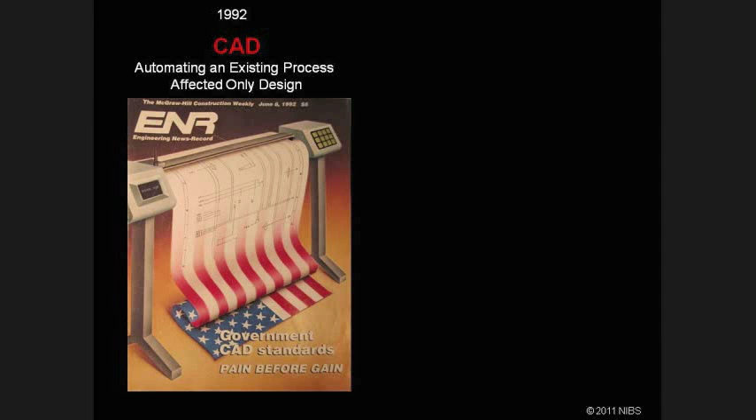Reality. Some view BIM as CAD on steroids, but nothing could be further from the truth. CAD only addressed one phase of the facility lifecycle, design, and only one workflow process, drafting. It didn't really cause us to change our business practices, though.

BIM, on the other hand, can have an impact to all phases of a facility's lifecycle, but that requires us to change our business processes to truly accomplish our primary goal of entering data one time and reusing it. Even more importantly, build an electronic model and then build to the model.

Unlike CAD, BIM is full of embedded information which can be shared with other facilities applications. Think of the possibilities such as combining geospatial data with model data. Then the model, along with its data, could even end up being more valuable than the building itself. There's so much opportunity to share data, but we need open standards to make this a reality.

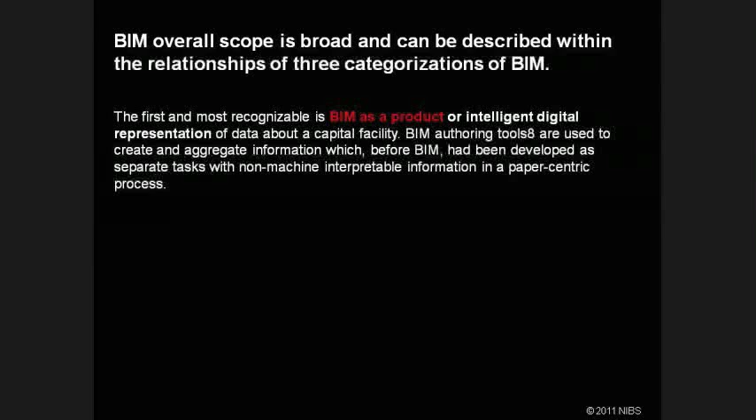People often think of BIM as only a design tool, which produces 3D models with stored building information. Well, BIM is more than just a product. It's also a collaborative process intended to improve business processes with open information standards, which will allow for more automated capabilities, ensuring information fidelity and sustainability.

But BIM is even more important as a tool for effective facility lifecycle management. It can help create seamless information exchanges and workflows which can be repeatable, verifiable, and sustainable. So look at BIM not only as being a product, such as an output of a software application, but also as a new collaborative process to improve workflows in the office as well as in the field. And finally, as a facilities management tool, assisting people who manage and maintain our facilities over their life cycle.

One of the main premises of BIM is to enter data once, then share it. In our traditional way of doing business, we work in vertical silos, and there's a lot of information lost during handoffs from one project phase to the next. We need for information to travel horizontally through the industry.

In order for that to happen, BIM needs to be seen as a common repository for information, essentially the foundation which all activities can draw from, whether it's for life cycle costing, energy conservation, or green building analysis. Although these activities need similar building data to solve issues related to their interests, they are unable to use the same information source simply because they often use different terminology.

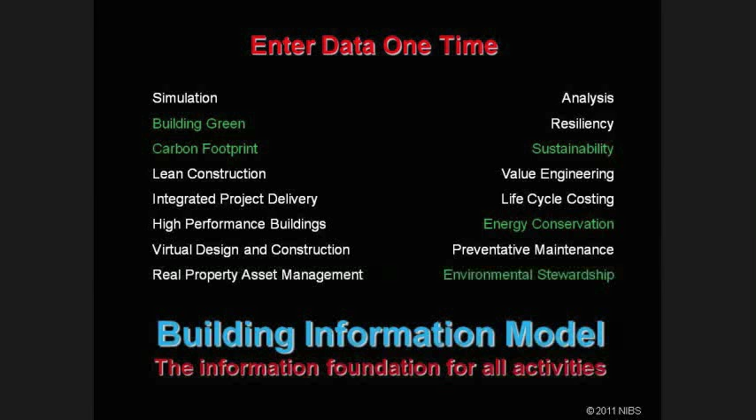Industry needs to recognize that without a standard language for communicating building information, the model data will never be used to its full potential. The Alliance has several projects which are addressing this need for a common dictionary, but we need your support. Help us determine what green data elements could be provided in the model.

BIM could be renamed Built Environment Information Model and probably be more accurate, as it does cover the entire built environment. It also now interfaces with geospatial information systems. Hence, this hierarchy developed by the Open Geospatial Consortium, GSA, General Services Administration, Open Standards Consortium for Real Estate, and ourselves becomes extremely valuable, especially to large portfolio holders.

What it shows is how information can be rolled up from the smallest part on the right-hand side of the drawing to the entire world view on the left-hand side of the drawing. The key point to remember is that you can always summarize detailed information, but the opposite is not true.

If you only collect information at the macro level, then every time someone wants additional information, they need to do a data call. When I worked for the Department of Defense and we had a portfolio of 570,000 facilities, you can only imagine how long that took and how inaccurate the information was, because typically we only had a few hours to respond. So everyone had to estimate, and therefore we could never have truly accurate information.

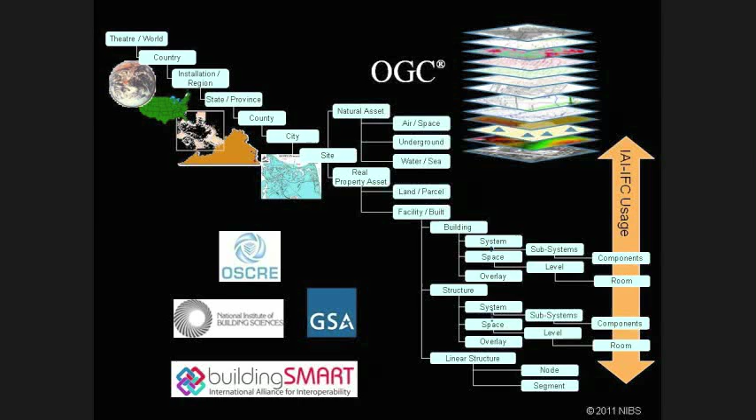This hierarchy allows one to capture both facility and geospatial information and works very similarly to the way Google Earth allows you to zoom into a location. Continuing with our look at the scope of BIM, we see that there are many ways we can use information stored in BIM. In this first view, we see that it's used for structural design.

In this view, we see pictures merged with models to better depict existing conditions in a renovation project. You can build your models from existing facilities as you do work on renovation or additions, and therefore collect it over time.

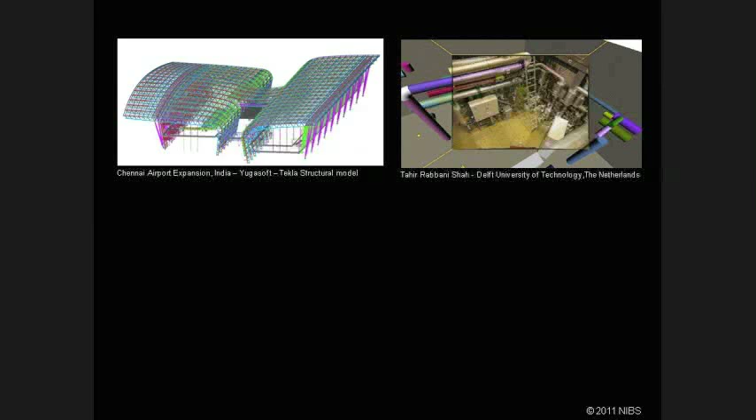If you have existing facilities, you can make the decision today that you're going to use BIM from this day forward. Then start a BIM for each facility in your portfolio. The Coast Guard did this and had what they called BIM blobs, as in their asset database they knew square footage and nothing else. Over time, about 20 years, they now have very accurate BIMs for most of their facilities. They are one of the few I know with that range of vision, however.

In this next example, we scan an existing mechanical room and create a point cloud for that space. From that, we can create a 3D model. Some software tools now can recognize various objects and can suggest some information to begin to build a true BIM.

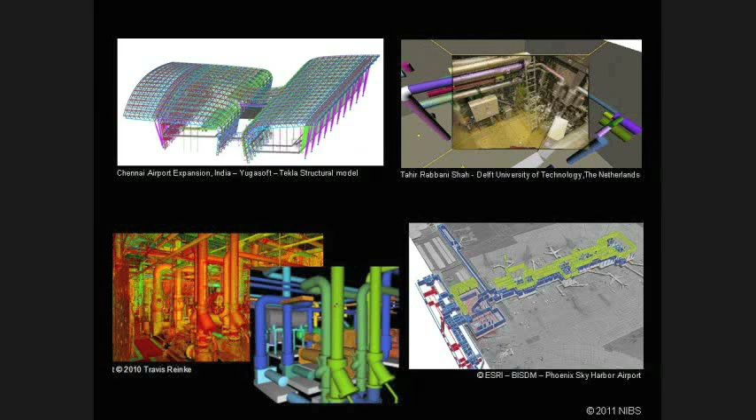This graphic shows an example of integration with BIM and GIS. Our fall edition of JBIM focused on the integration of these two information streams working in the cloud. There's tremendous opportunity in this capability, but also a fresh set of problems. We need to tighten up security and add metadata to our model building.

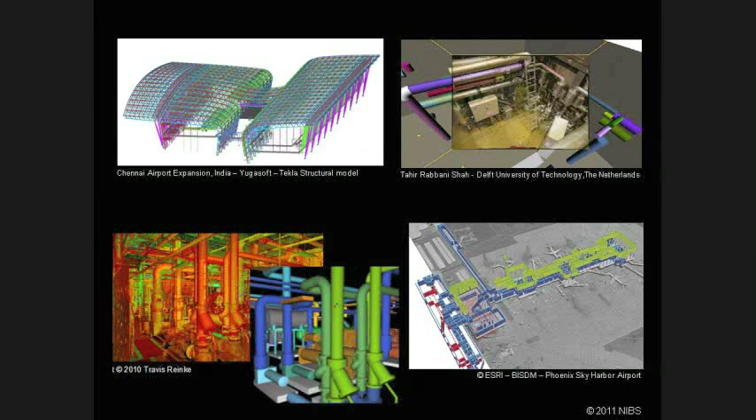This is a task that needs to be done in any scenario if we are going to share and trust information that flows through the model and between stakeholders. Being responsible for one's actions can accurately be tracked in a model. Who did what, when, and for the life of the facility should be of primary interest.

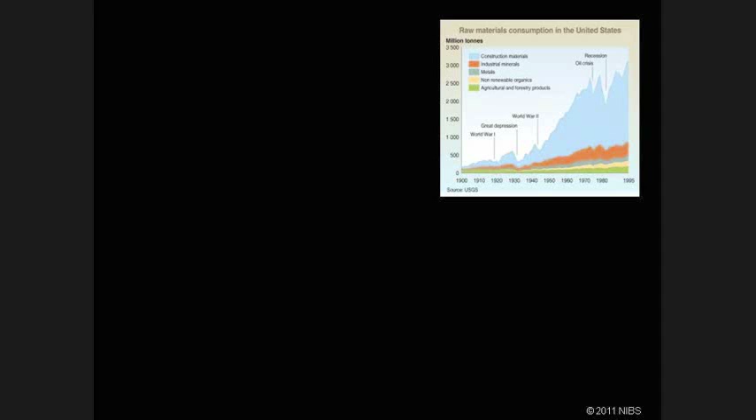We talk a lot today about sustainability, but we're also a long ways away from sustainability at this point. This must be a primary discussion in the construction industry because far and away we are the largest consumers of raw materials on the face of the planet. Improving the judicious way designers use materials will have the greatest impact. Lean construction techniques will also begin to reduce the waste.

While we talk a lot about sustainability, we must not be very effective, because I see very few life cycle costing tools available today. We primarily make decisions about initial costs, but rarely look at the long-term impact of those decisions, largely because we don't have the tools. This was highlighted in the AECOO-1 testbed completed in 2009.

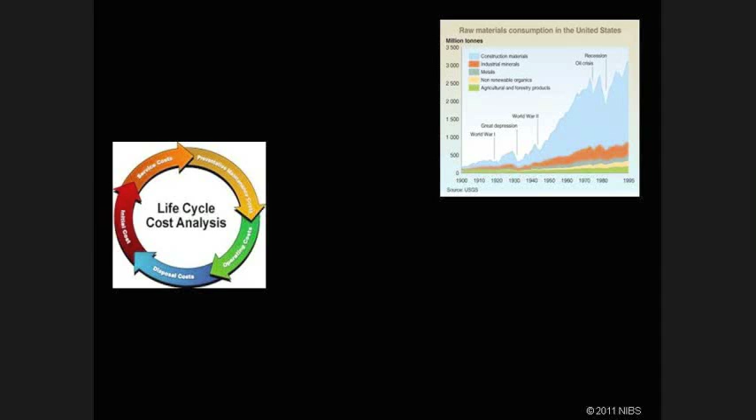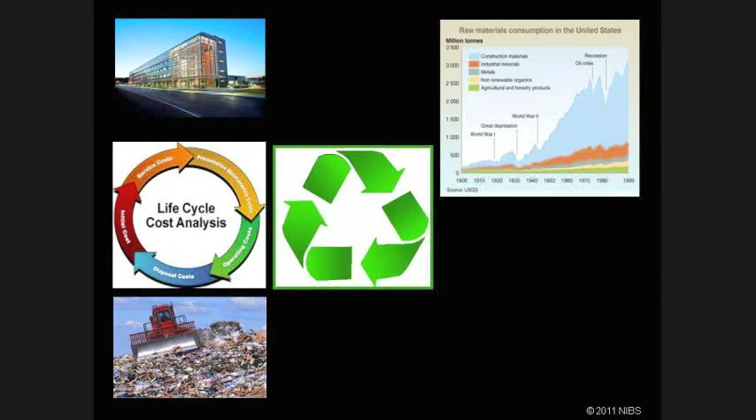The question also has to be asked about the end of life of a facility. How much of it ends up in landfill, and how much of it ends up being recycled in a new facility? Don't get me wrong, we are making some right decisions in moving to alternative forms of energy, but we are also not really addressing the chart in the upper right-hand corner just yet.

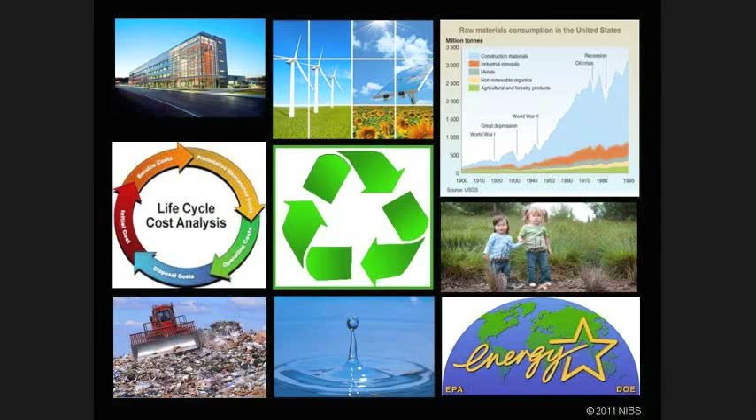We have a lot of challenges, including better use of water. This is a resource that many take for granted, while over 40% of the world's population does not have potable water to drink. The actions we take today will have lasting effect on our children and our grandchildren. We need energy to accomplish almost everything we do, whether it be building new facilities or occupying them. We must learn to be far more sustainable than we are today. We have to look at our facilities with a vision of full life cycle responsibility.

When you look at the activities BIM is involved in from a life cycle perspective, you could break it down into what is shown in this graphic. Often BIM starts at the programming stage, but it doesn't have to. You can bring BIM in at any phase. During conceptual or detailed design phases, the BIM data can be used for analysis for optimizing the building.

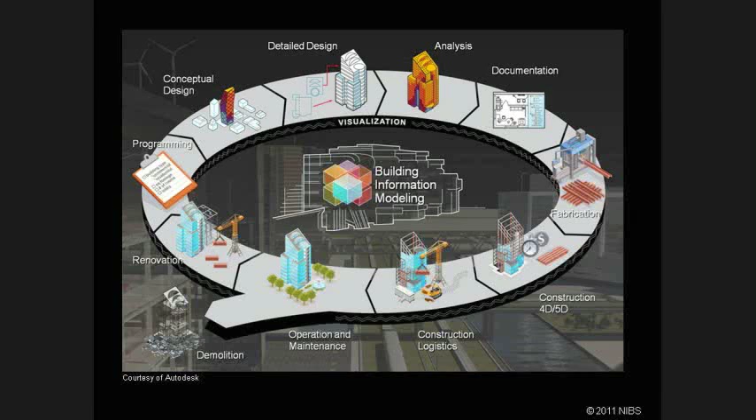BIM can also be provided as part of the construction documents for the contractors, who will use BIM for prefabrication, scheduling 4D, cost estimating 5D, even site logistics for determining laydown areas, crane locations, and emergency egress routes. Finally, the owner can use BIM for their O&M activities and even into future renovation or demolition projects.

But we're also finding other non-traditional activities which could benefit from BIM data as well as the virtual model. For instance, management briefings, condition assessments, space utilization. Under laws and regulations, we're starting to see building code checking programs emerging. We even have the ability to perform simulations with BIM for lighting, sound, insulation, and firewalls.

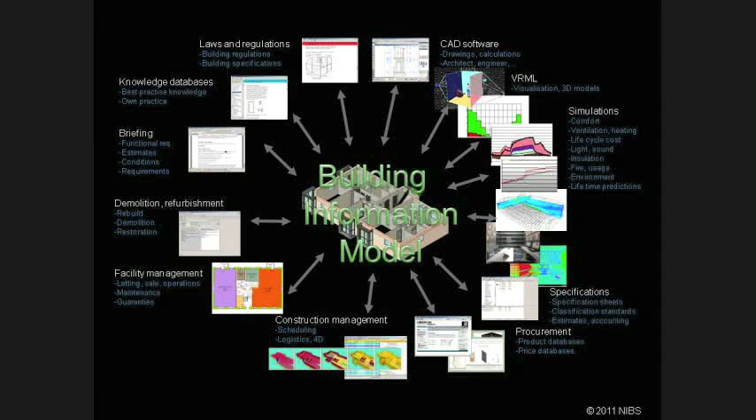Procurement practices. We'll start seeing bidding documents, no more 2D drawings, just give them the model. The bottom line, business as usual is just not an acceptable option anymore.

Our goal is to build a complete electronic model of the building or facility, work out all the problems, then build the building from the model. The model must be a true representation of the facility ultimately produced. In fact, we should expect that the model should be more informative than the building itself.

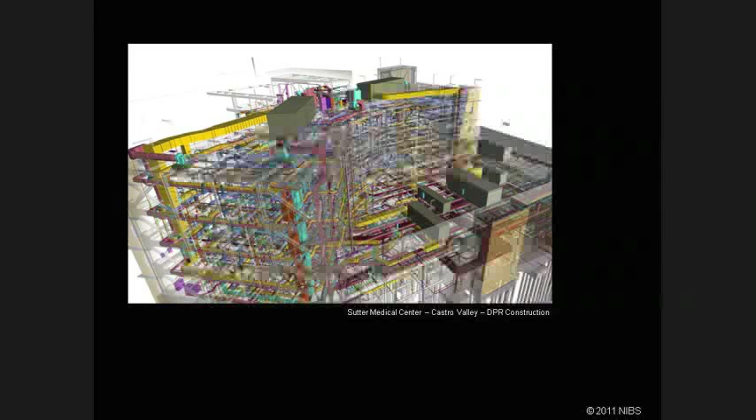There are significant complexities in today's facilities that must be represented accurately. If we fail to do that, then those issues will only come up in the field, often after concrete has been placed or steel has been fabricated. As we know, it is far more expensive to fix a problem at that point in time. The model should also be able to accurately predict the performance of the final product.

I recently visited a facility in London South Bank University. The Center for Efficient and Renewable Energy in Buildings uses this metered and sensored building to teach facility management to students. They can use the rooftop laboratory to test different products such as photovoltaic panels and can see how the facility performs. There is a large dashboard in the classroom on the top floor, as well as windows in the mechanical spaces and in the floor to see underfloor reheat units. This way they can completely understand how the facility operates and record its performance.

My proposal would be build a BIM of this facility. Then you could test various software analysis tools and predict the performance of the facility and then accurately verify that analysis by looking at the performance metrics. We need this kind of feedback to test our analysis tools, but this would be an easy place to start. Is anyone interested in funding a laboratory such as this?

If we are serious about all these ideas and issues, we need that type of facility. There are certainly some facilities in the United States that are sensored and metered, and that we should be able to set up similar test beds. We need a variety of facilities that the software vendors could all use.

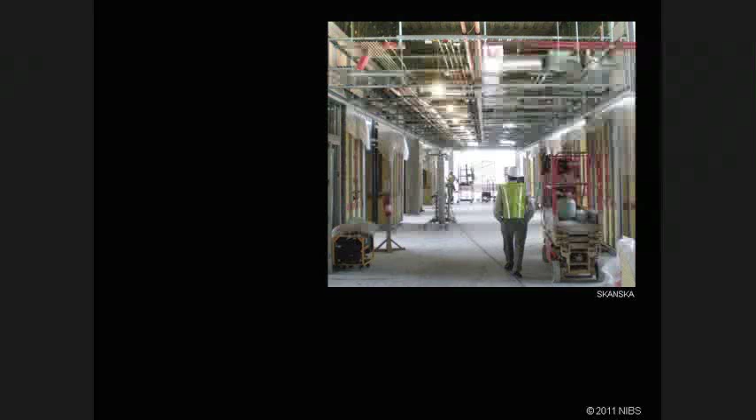What BIM is able to do is create a much safer work environment both during construction and occupancy. Using BIM to facilitate off-site prefabrication and modularization promotes safer, cleaner job sites by reducing trip hazards of stored material and also by the noticeable reduction in waste. In all, an improved working environment for the safety of the contractors. From an operational perspective, modeling also helps owners understand how people will occupy, operate, and maintain facilities to reduce hazards for the life of the facility.

While we have reportedly reached the tipping point with BIM, we are nowhere near the level of potential that this approach will bring to the industry. We need to do a far better job of adding the I to BIM: information.

Collecting information is difficult, especially the way we do it today. Today, typically, all information is generated or captured early in its development electronically. However, we have a nasty habit of converting this information to less usable format, such as printing it on paper or even converting it to PDF. We need to keep the information usable.

Many industries, especially in the logistics community, have gotten to this point. You can now easily track a package across the country until it is delivered to your front door. However, banking, medical, and many other industries have made the transition to the information age also. We've not quite gotten there yet.

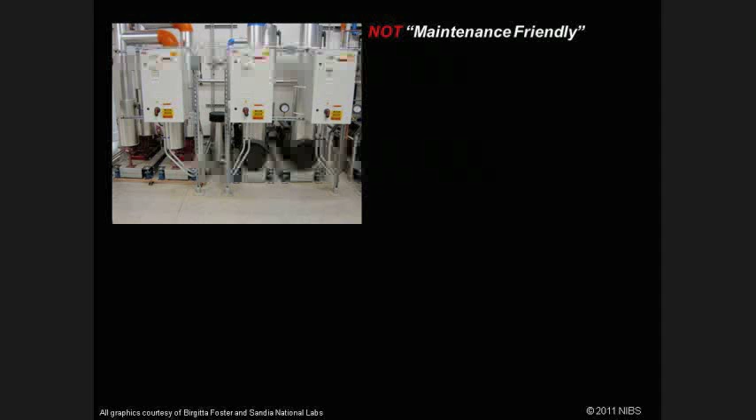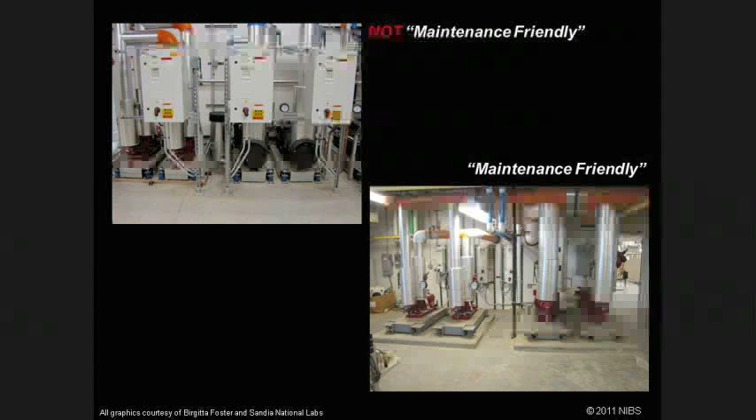This second example is what I call maintenance friendly. This is a good installation with plenty of room to access the equipment. But how can BIM help us solve this age-old problem of designs which provide inadequate access for proper maintenance activities to be performed safely? With BIM, the design team can see all the components around the equipment, properly scaled. Then, using an avatar, we can validate to the owner that there is enough room for the operations and maintenance teams to perform routine and unscheduled maintenance. This type of maintenance evaluation, conducted during the design phase, could then become a deliverable to the owner.

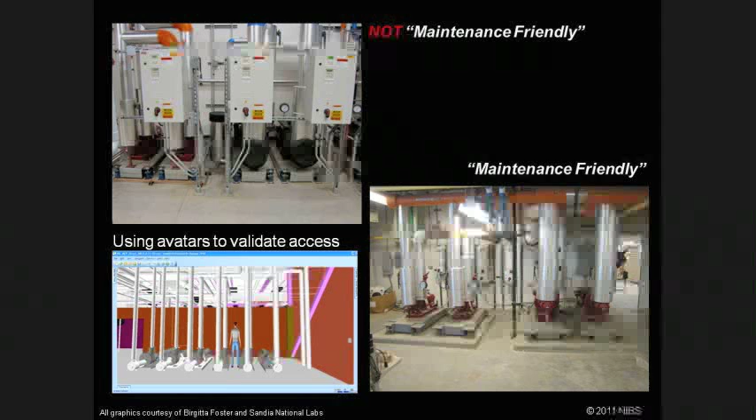This seems to be continuously an objective just out of reach, yet it is critical to achieving most of what we have talked about thus far. We are moving ahead with a National BIM Standard version 2, and I have every confidence that we will produce a product this year. What will be included in that is up to you. If the green community is not involved, then this version of the standard will not be green. It's totally up to you.

The train has left the station, but there is still time to get on board, because we do not start accepting ballots until March. But there is a lot of work required to submit a ballot that the rest of the facilities industry will understand and will be able to vote on. But not to worry too much. We will likely start another version of the standard next year to add more domains. Clearly, the industry is moving in the right direction.

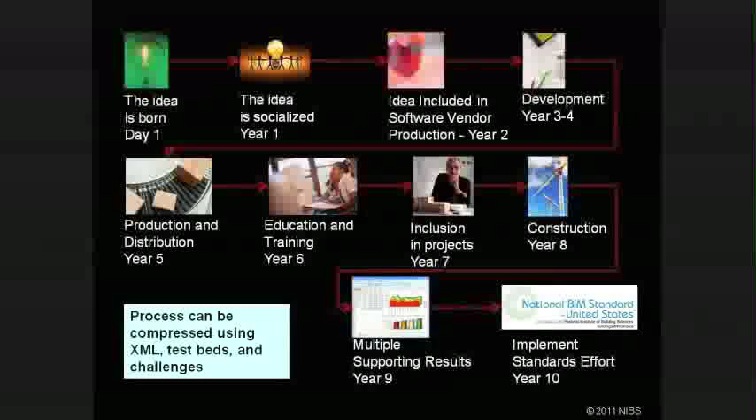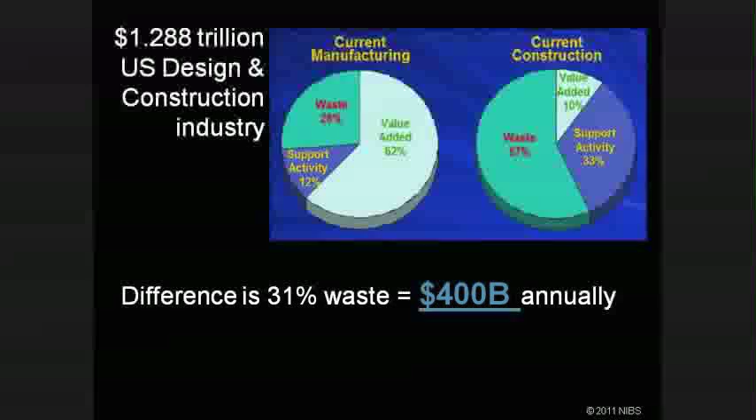So, just how big is this target of opportunity? The U.S. design and construction is approximately $1.288 trillion a year. In 2004, Construction Industry Institute and Lean Construction Institute developed this chart indicating that there's approximately 26% waste or non-value-added effort in the manufacturing environment, while in the construction industry that number was more on the order of 57%. If you just take the delta between these two numbers of 31%, that equals almost $400 billion annually. That is money that could be better spent on infrastructure renewal or in process improvements.

Yet, to date, we have only invested approximately $1 to $2 million on open BIM standards through the Alliance over the past 3 years. To me, it does not sound like we're serious about fixing the problem. Or maybe the problems are so deeply embedded in the way we do work that we don't even think we have a problem.

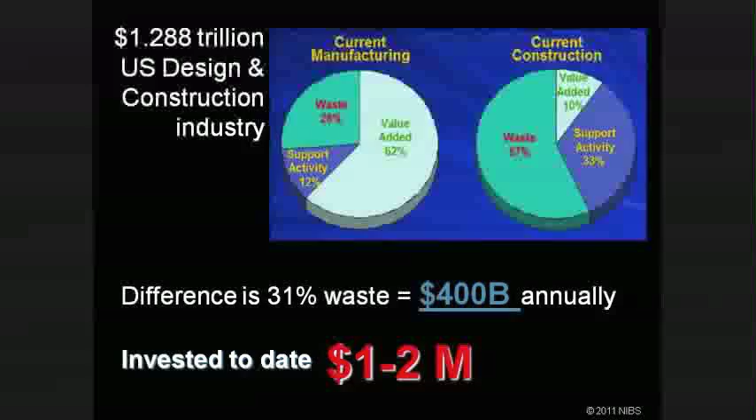To develop the central support to coordinate and develop the standards, it will require $5 million annually over the next few years. While most of the standards work will be volunteer and in-kind or specifically contracted efforts outside our core competency, there also has to be positions funded to coordinate. Yes, $5 million is a lot of money, but when you consider that the savings from just one BIM project often exceeds that amount, it's not such a large number. At the University of Southern California's School of Cinematic Arts, in their second phase of the project, they came in $6.4 million under budget and also delivered 4 months early.